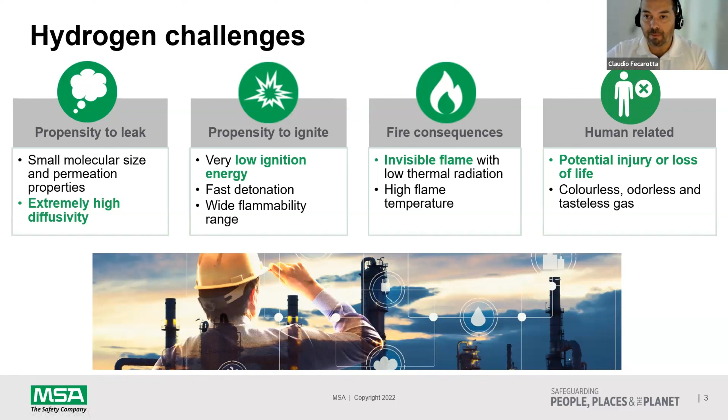The consequence of that is an invisible flame when fed by even 100% volume hydrogen, with low thermal radiation and high flame temperature, which means that a potential injury to life can happen at any time, due to the fact that it's not possible to see the flame, even if it is present in a path where people are working.

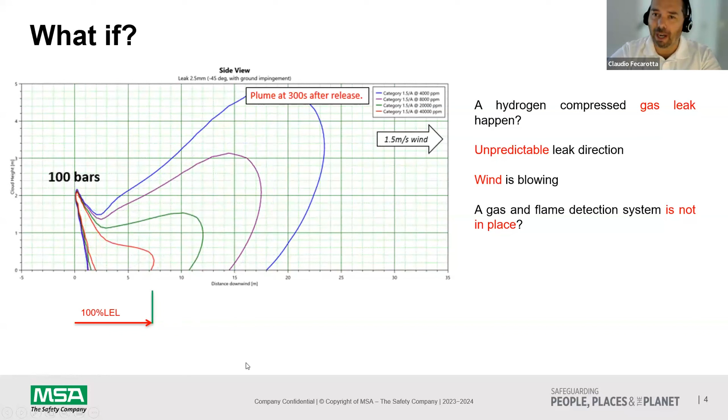You can see the red line at a certain point with 100 bar can reach up to 7 meters down on the ground. So we have to say that it is quite complicated to admit that hydrogen will always go up. Let's think about how to solve this issue.

First of all, what is the scope of gas and flame detection? Especially for gas detection, which is the first defense in terms of safety, it is the early alarming that will help to avoid any dangerous situation on your side. So we are talking about protecting before the condition becomes flammable and explosive. So for hydrogen, we are talking about 4% volume in atmosphere.

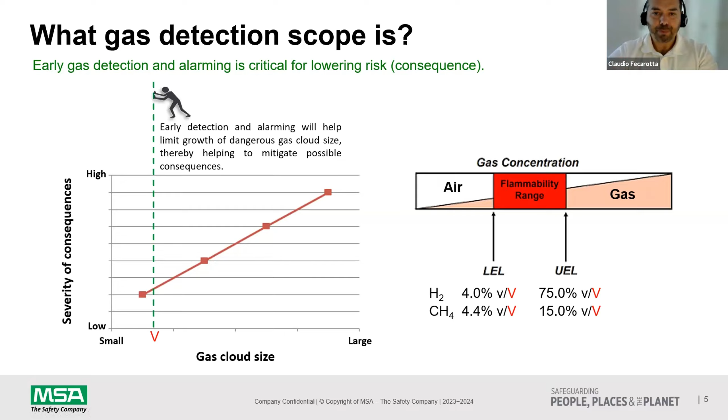So that is our scope, to keep the level of, or to even trigger the safety system at a certain early time in order to avoid that it becomes very dangerous. How we can detect the hydrogen leakage and which type of sequence we have to consider in order to be very efficient to avoid a potential worst scenario.

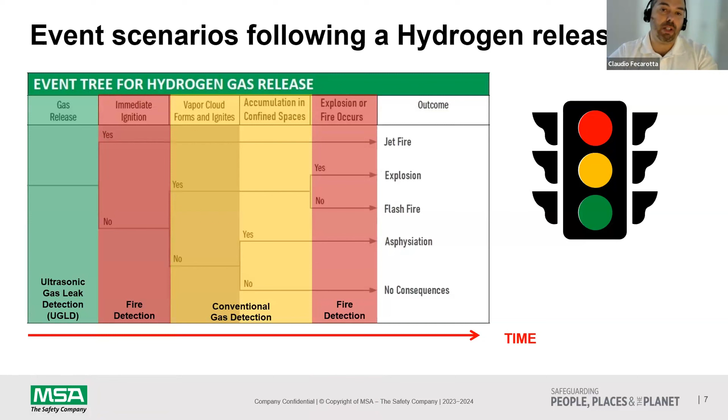In this case, conventional gas detection will be useful to be in place because that might be a potential resolution in order to avoid the last catastrophic stage with the flame and explosion, which only the flame detector is able to detect, in a condition where it's too late even to protect the asset.

Go back to the technology. When we are talking about the green stage, the traffic light is saying to us, if we detect at the speed of sound, there is only one technology able to detect in this way. We are talking about ultrasound technology. It is not affected by the wind, it is just hearing the sound. If you recall, every leakage is generating sound.

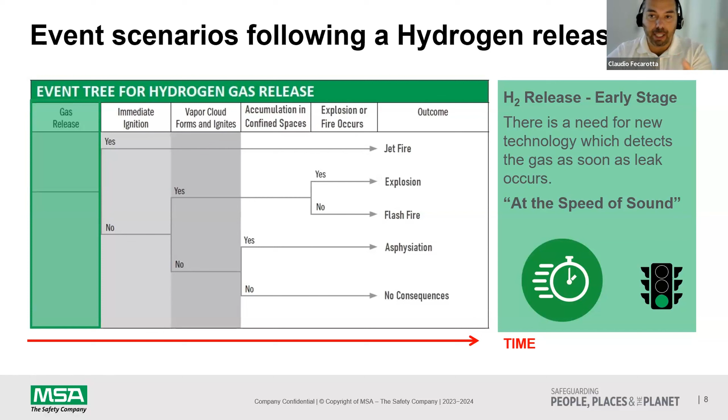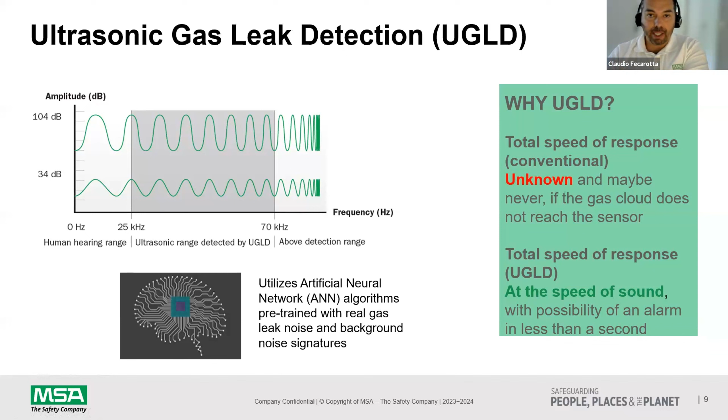How does it work? From the generation of sound, we just cut to the ultrasound level. So everything that is in the human hearing range, we don't care. We just cut it off. And using the frequency between 25 kilohertz up to 70 kilohertz, there is an ANN, artificial neural network, able to recognize with a combination of algorithms what is happening in this band, where the noise or the sounds come from, in order to recognize that it is a leakage or is coming from a different type of source, which might be a false alarm. So with the ANN, that is the easiest way to recognize between real leakage and the background noise.

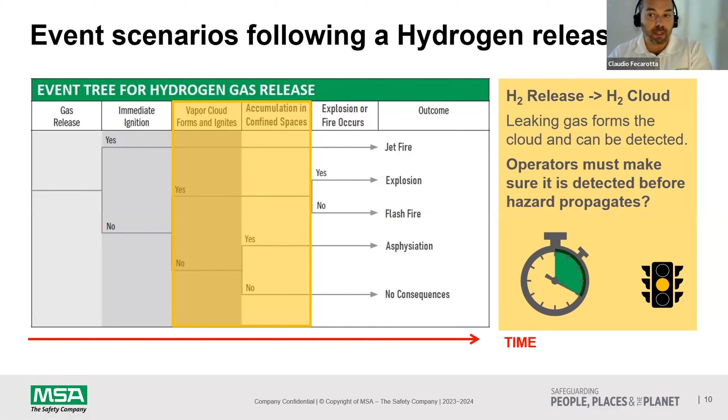Second protection layer. That is based on conventional gas detectors. We are talking about when the leaking gas is already in a cloud form. The only option here is that the operator must make sure that it detects before it propagates, in the right position. So we have to wait until the cloud is reaching it. That is the unknown time that it will take. That's why the conventional gas detector becomes yellow.

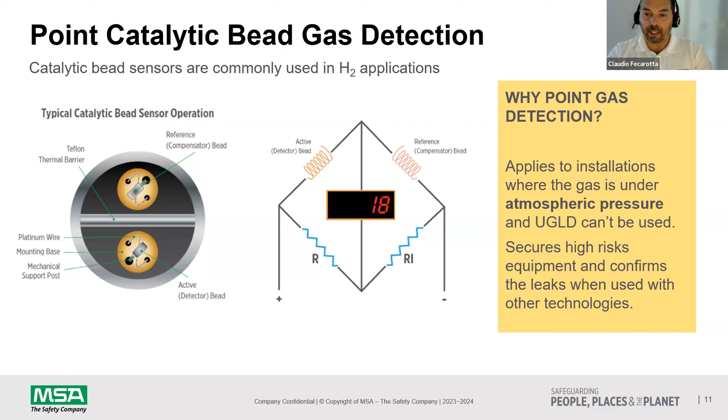That has to be very stable. That's why MSA is using this technology with a specific design, because it's very important, because it's the last resource in detecting the leakage when it is forming a cloud.

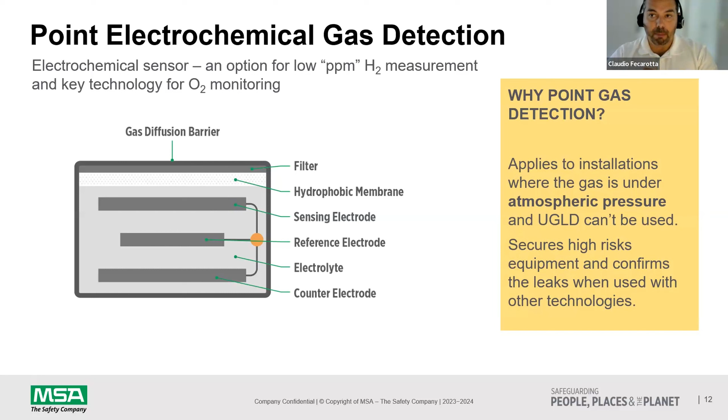There is also another technology called electrochemical. It works like a battery with an electrolyte inside that is reacting when hydrogen is hitting the sensor. So the consequence is that we have the option to monitor or to detect the ppm range rather than the percent LEL. ppm is up to 1000. It's very sensitive. So that is a technology that is recommended to be used when it is needed to detect at the very early stage in ppm, so very small molecules.

The last protection layer is when it becomes flame. That is the most dangerous situation.

Anyway, we need to have the appropriate technology to detect the flame. How does it work? MSA is using the combination of ultraviolet and infrared sensors, because the two types of sensor are able to see the emission of the hydrogen radiation, which in this case is 2.95 micron. Let's recall that for the hydrocarbon flame, we are talking close to 4 micron, which is completely different. That's why we are able to see the transparent and invisible flame from hydrogen.

Why do we use an ultraviolet sensor as well? Because in this case, the combination of the two sensors is able to avoid any false alarm coming from a source generating ultraviolet radiation. The combination of the two gives a detector able to see the flame from hydrogen, with wide coverage of area. It works like our eyes, so it sees the flame at a very early stage.

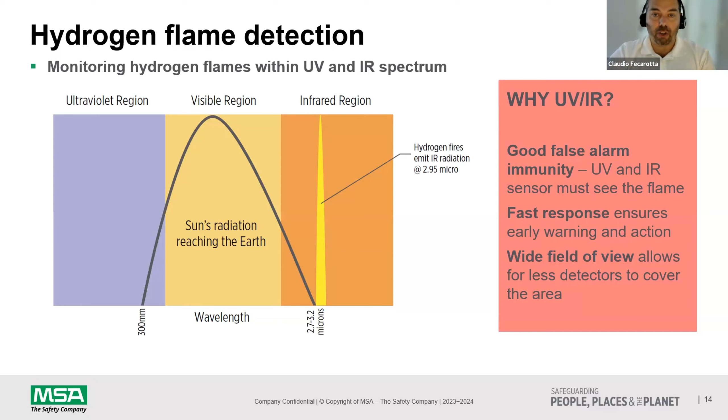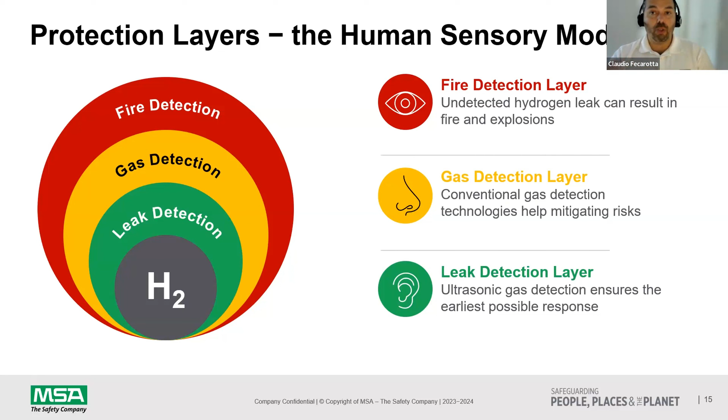So the combination of the three technologies makes what we call the protection layer. It is a combination linked to the three human senses: hearing, smelling, and seeing. The combination of the three layers, the three technologies, is able to give the complete package of the safety concept. It is also very efficient, because we can detect from an early stage up to when a flame is generated, and it is very important that those three technologies work together.

So if you recall the first slides with the simulation of the propagation of the leakage under a certain pressure, you can imagine now, understanding the three technologies, that having them on your plant will be able to protect your assets and your people against any possible worst scenario generated by the leakage of hydrogen and potential explosion. With our three technologies, we are answering the main question about the influence of weather or wind direction.

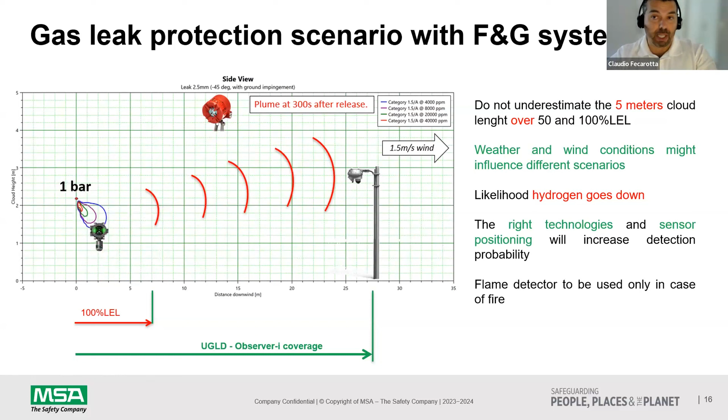So with the ultrasonic gas detector, we can detect by hearing the sound of the leakage. With conventional gas detectors, catalytic and electrochemical, we can focus on detecting close to the point. Look at the pictures. And the third protection layer is based on the flame, which is the last stage when the potential leakage becomes a flame, which I hope will never happen. In this graph, you can see that the ultrasonic gas detector is able to cover up to a 27 meter radius over 360 degrees. So that will be really interesting to cover a wide range of your plant.

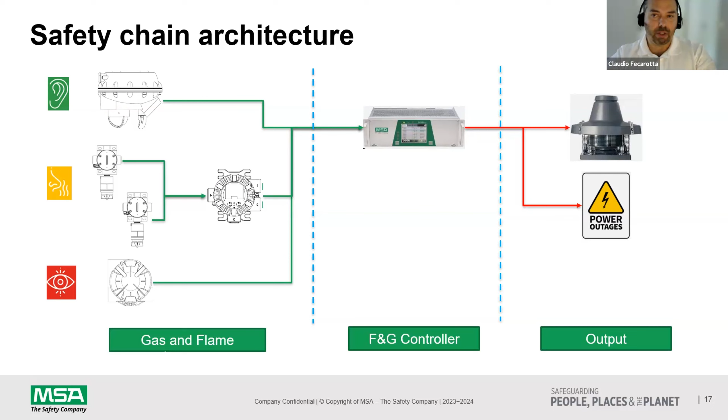A safety chain architecture is based on the combination of the three elements, the three sensors, with an MSA controller, and then you can trigger the safety solution like shutting down the voltage or even initiating the ventilation, depending on the application. Remember that every case is very specific. That is just the overview of the technology of our products.